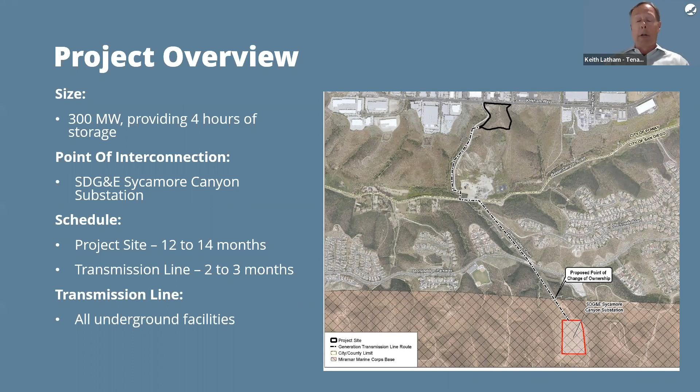I think most people know where this is located. It's up on the hill of what we call the granite site, and it's on a roughly 100-some acre project site that's currently being mined and reclaimed by the Granite Construction Company, owned by Clearco, up near Costco and Home Depot on top of the hill. And again, these are Tesla lithium-ion batteries.

And the biggest thing, I think, that we can tell you about this facility and its safety from a fire protection standpoint is that this is lithium iron phosphate. LFP is the latest technology that is the safest technology of lithium ion batteries. We'll talk a lot more about that later, but just know that this is different technology than has been used previously and has been the subject of lots of stories in the press. But basically, we've been working hard to make this a safe and good asset for the community and the region, and ultimately believe that's what it can be. Next slide, please.

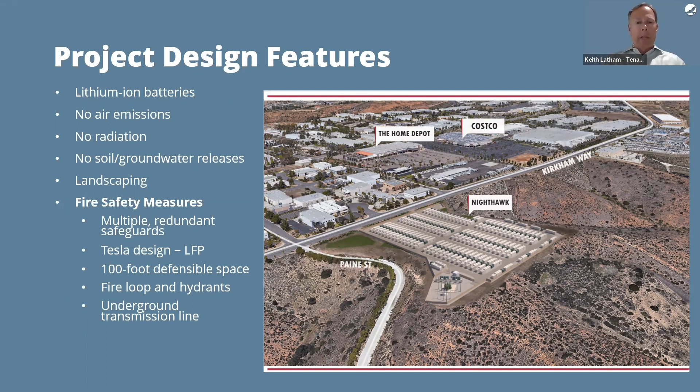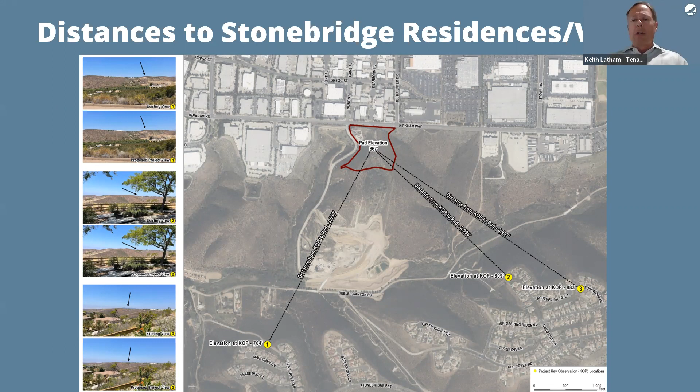Our pad elevation is roughly 867 feet. It's about the same elevation as Kirkham Way. And then basically the topography goes down to Beeler Canyon Road and then goes back up the canyon towards Stonebridge and the homes in Stonebridge. I've also got a cross-sectional view that I'll show in just a second as well. Next slide, please.

This is KOP1, which is key observation point 1. And this is at an elevation of 704 feet versus the 867, where the facility is going to be up on top of the hill where the arrow is pointing to. And as you can see, you're really not going to see it from this location or really any location within Stonebridge. It's not going to be visually apparent.

The higher elevations of Stonebridge are further to the south and further to the east. And where you can see it, you really won't be able to tell anything because you'll be 3/4 of a mile or further away from the actual facility. Next slide, please.

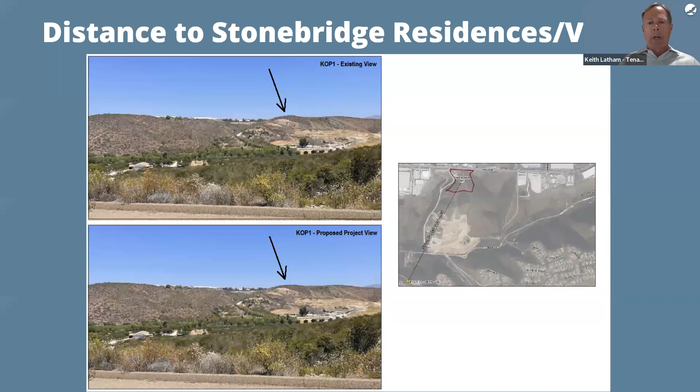This is observation point 2. And again, this is at an elevation of 809 versus 867. You can kind of see a little bit where it is in the second picture there. It's just a little bit shaded green from, I guess, whatever will be done to mitigate and bring the vegetation below the project back to normal, but otherwise you really can't see that.

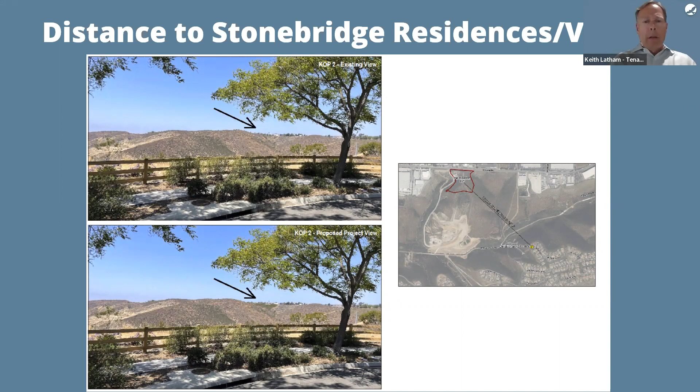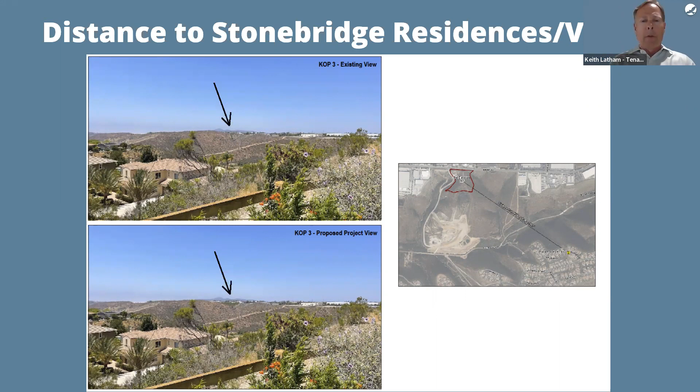Finally, observation point number 3. Next slide, please. This is just further east and about 4,000 feet away from the facility. Again, really not very visible from that distance. Next slide.

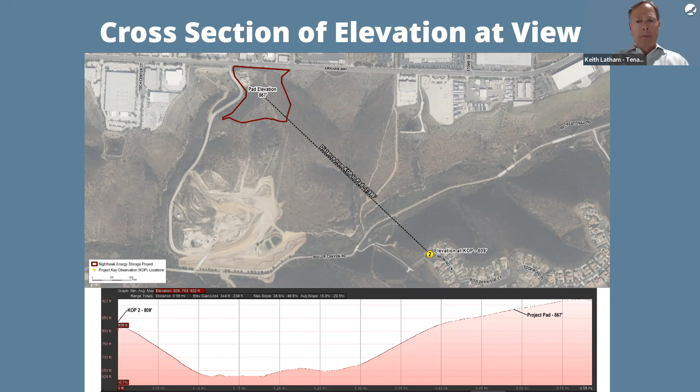So just to give you an idea of what our overall schedule is, we've been working on the design for a couple of years and working on our application submittal for a while. Submitted our application back in March of 2022, started our permit processing, and that's ongoing.

Starting construction is hoped for after we get through our permit process, and commercial operations date is expected to be a year from that. It's a 12-month construction period for the facility and about a 2 to 3 month construction period for the transmission line. The expected facility life is about 20 years. And next slide, please.

Want to talk about some of the issues that we've heard about, or some of the resolutions that we've been able to provide. I mentioned the overhead transmission lines right off the bat. That was a major non-starter when this was brought up, and we've committed immediately to fully underground transmission lines.

Open trenching. When we were back at the community in June of last year, we were thinking about open trenching across Stonebridge Parkway. That would have been probably nighttime construction to minimize traffic disruptions. Subsequently, we decided, for both the community benefit as well as environmental benefits, to ensure we don't impact wetlands on the other side of Stonebridge, we decided to bore underneath the Stonebridge Parkway.

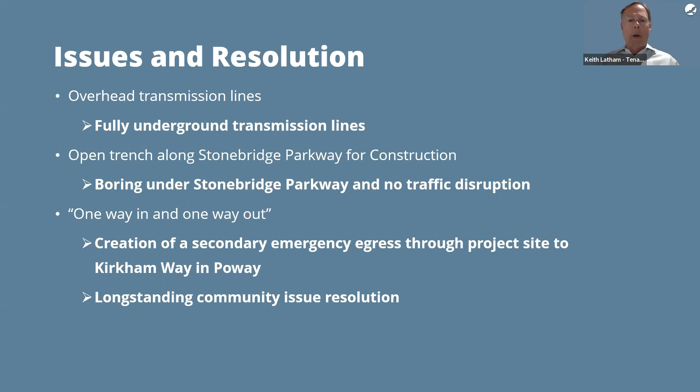Additionally, we've committed to making sure that we address brush that is overgrown in some of these access roads, and ultimately we'll be continuing to resolve and coordinate this issue with the various fire departments and emergency response personnel, as well as the community, as we work through the development and get into construction of our project. Next slide, please.

We've had noise questions from members of the community, and I just want to emphasize that from the closest resident or the farthest resident, you will not hear a thing from our facility once it's up and operating. If you were 15 feet away, you might hear a low hum, but there is not going to be any noise coming from our facility that any resident in Stonebridge will hear. And it's fully compliant with the Poway noise regulations, but nothing will be able to be heard at any time of day or night.

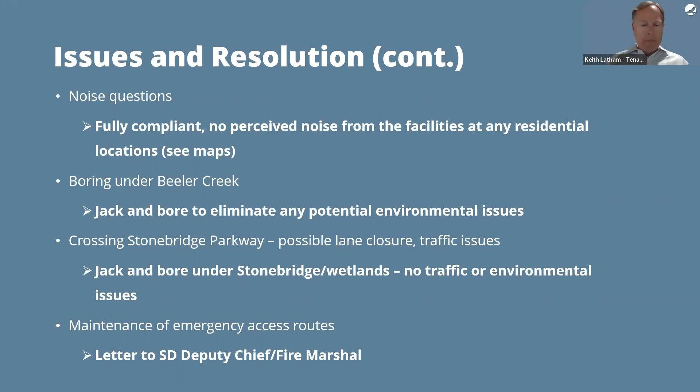We talked about boring under Beeler Creek and Stonebridge Parkway. Beeler Creek as well will be jack and bore to eliminate any potential environmental issues, and the same thing for Stonebridge, like I discussed earlier. I kind of briefly touched on maintenance of the emergency access routes, and we've submitted a letter to the San Diego Deputy Chief and Fire Marshal committing to do this, as we have offered to the Stonebridge Board of Directors as well. Next slide, please.

Just to make sure everybody knows what the emergency egress routes are, these are the existing access roads that were put in when the community was built. And so our commitment is to maintain the access roads from a brush perspective to ensure that there's no problems getting through should there ever be an emergency. And there's been a question raised as to why the change of heart from the San Diego folks. I can't say why the police department, we haven't talked to the police department, but we have definitely talked to the fire department, and they are very eager to facilitate this. And the folks in Poway were also agreeable to make this happen.

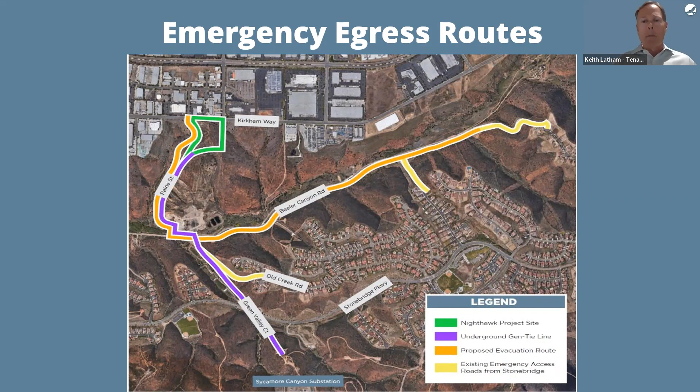So regardless, we're trying to provide benefits of an emergency egress across the Beeler Creek through the dam that is there, and then up the road, which is also a 2-lane paved road that I've been up and down with my car many times. Next slide, please.

So really quickly, and we can dive into this a lot deeper, but from a fire safety perspective, the differences in the technology versus other incidents that have been in the press are significant. One main issue is it's a change in technology, and Tesla about a year and a half ago made the commitment to change technology from previous versions and previous battery chemistries. Previously, they were using, among other things, nickel manganese cobalt technology, but they made the switch to lithium iron phosphate just because it's a much safer battery chemistry. And so our plan is to use the Tesla Megapack 2XL, and that is the battery product, the lithium iron phosphate technology that is extremely safe.

And batteries are regulated by a lot of different standards and codes, fire protection agencies, and electrical engineering, and UL. I'm drawing a blank. Underwriters Laboratory. Sorry, Underwriters Laboratory has several tests that all the battery manufacturers need to comply with, and one in particular is the 9540A test protocol, which is basically see what happens when a battery is forced to catch on fire and what happens to surrounding battery units.

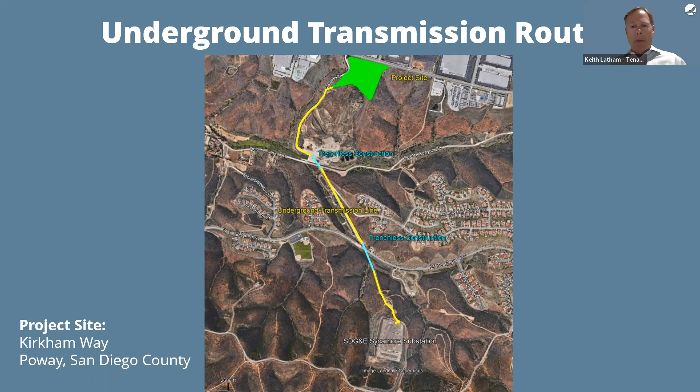So the first thing when we start our construction, after we survey and make sure we understand where all the utilities are, is to do some trenching, and we'll create a trench. It'll be easier in general going through the non-paved areas. Most of what we're crossing is non-paved, it's just dirt. And so we'll be digging something about this size, and this is a proper width. Next slide, please.

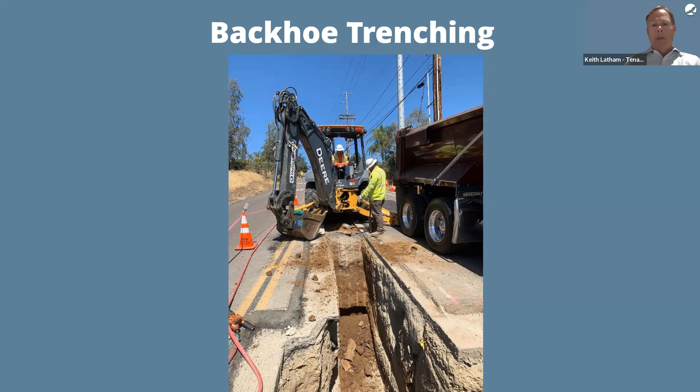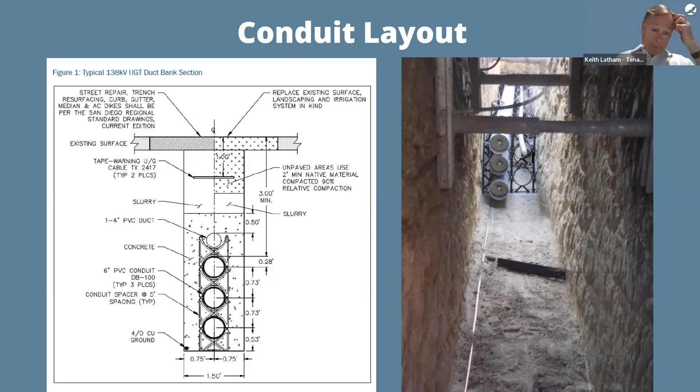It'll be about, I think, 1,800 feet going across Green Valley Court where that utility corridor is. So that's a 9 or 10 day process of work during the day only. And during this time, I want to emphasize that Green Valley Court utility corridor will be open for walkers. There'll be enough space to get a car down there.

But if you walk your dog or run down there, or ride your bike, whatever, that'll still be open, and you can come and check on the construction progress or do your daily constitutional, whatever it is. That will not be closed, and you'll still have access to that during the construction period. Next slide, please.

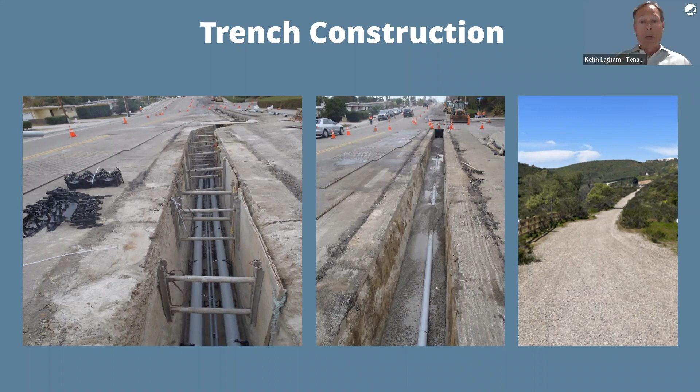Every 2,000 feet or less, because we have 2,000-foot spools, is how long they make these transmission lines. There's a need for a vault. So there's going to be a vault where they splice underground these transmission lines, and you can just see these are concrete vaults that will be lowered into the ground. And then when the wires are put in after everything is complete, they will splice them,

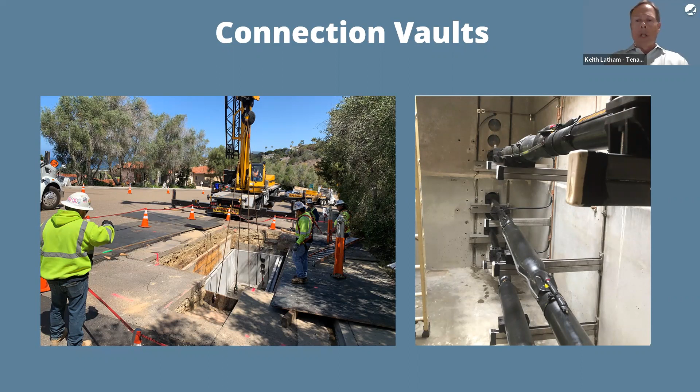and there'll be a large steel door on top, large enough to get in. It's not as large as these vaults, but at least it'll be there. And otherwise, that's all you will ever see from the facility. Next slide, please.

And as this continues to go forward, there'll be occasional times when we need to empty this area out because it's full of soil. So we'll take dump trucks off periodically, but slowly this will go through and get to the other side of the pit. As this goes 20 feet forward, they'll lower another pipe in, weld it on, and continue the process until it reaches the end pit, the receiving pit.

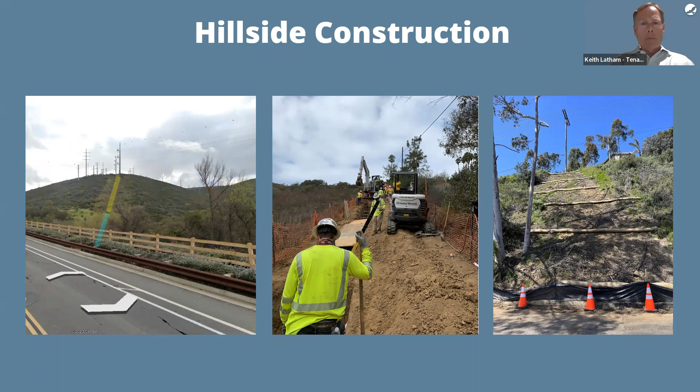I want to talk a little bit about insurance, and we've had a lot of discussions over many months about insurance and fire insurance and challenges that the Stonebridge residents are having with fire insurance, and we understand that, and actually thought that maybe we could have a significant benefit to Stonebridge residents by providing the emergency egress paths. And what we found out, I work with one of the #1 Farmers agents in California as my home insurance and auto and everything else.

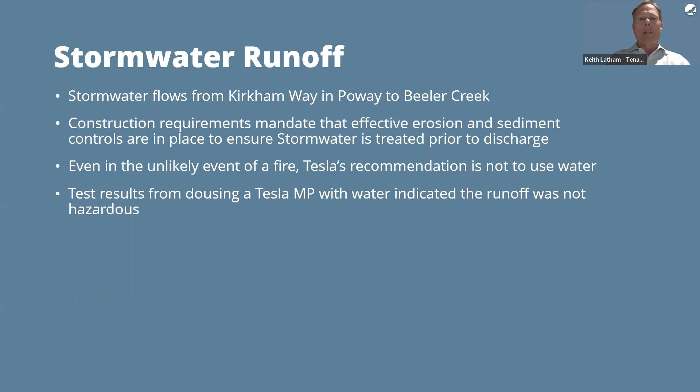In the extremely unlikely event of a fire, Tesla's recommendation is not to use water for the new lithium iron phosphate batteries. So they don't believe it's going to burn, but if it were to burn, they don't recommend using water. And even if the fire department decided they wanted to use water just to be sure, test results from burning Megapack tests that they've done confirm that there's no hazardous runoff. Next slide, please.

So just kind of where we've been and where we're hoping to go. So we started, as I mentioned, February of 2022 with the Poway City Council pre-application meeting. And we came to the Stonebridge community in the neighborhood park on June 8th of 2022 and had some good discussion there. Prior to February 1st, when the Stonebridge Board of Directors had a meeting, we submitted a proposal to the board with an easement agreement and a proposal to try to work to negotiate an agreement to be able to cross

the Stonebridge property. On February 28th, the City of Poway had a neighborhood open house, and some residents were in attendance there, and we got an opportunity to speak with them. And March 2nd, Scripps Ranch Community Planning Group had a meeting, and we presented there and were approved conditionally, assuming that the Stonebridge Board of Directors ultimately agrees to support us. And tonight we're having our community update with Stonebridge. And our hope is in the next couple of months, we'll be before the Poway City Council, as well as City of San Diego for approval for our respective permits in these various jurisdictions. Next slide, please.

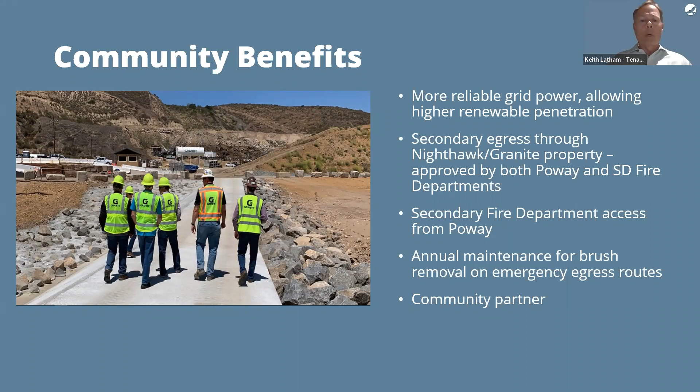So anyway, we committed to annual maintenance for the removal of brush on the emergency access and egress roads. And ultimately, we want to be a good community partner, and we're willing to do what it takes to make sure that we are a good community partner. We'd like to provide STEM education benefits to, I know there's a private school in the middle of Poway, to be able to provide upper grades with STEM education benefits and help them as they're moving forward in their scholastic career. And other things that are important to the community. We want to hear more about that and what we can do to help out. But ultimately, we're asking for your support and want to continue the dialogue and answer questions as we can. Next slide, please. And that was the end of the presentation. As I mentioned, we went through a lot of information on a high level, but we're happy to go into things deeper as we can.

Great. Thank you, Keith. Appreciate the presentation. And what we're going to do now, as promised, is move into the Q&A section of our presentation tonight. So we've received a fair number of questions in advance of this meeting, as well as in the Q&A button at the bottom there. So we'll be answering those questions that were received in advance of the meeting, as well as those received during the meeting. If you didn't submit a question in advance, you can still go ahead and put that into the Q&A box.

Or if you're someone that would prefer to speak and ask a question, then what we would have you do is if you're joining by telephone, there's the raise hand button, or you can do that on your screen. There's a raise hand button, and then we will make the audio accessible to people as we call on people, so that people can make their individual comments.

So if you're joining by telephone, and some people are joining by telephone and not by computer, you would want to dial *9 to enter into the queue to ask a verbal question. And then when we call on you, it'll be *6 to unmute. And Emily Fan Michelson is going to be monitoring the Q&A box and reading questions out loud, and any of the repeat questions, because we sometimes get a lot of the same questions that people submit, we will consolidate those questions.